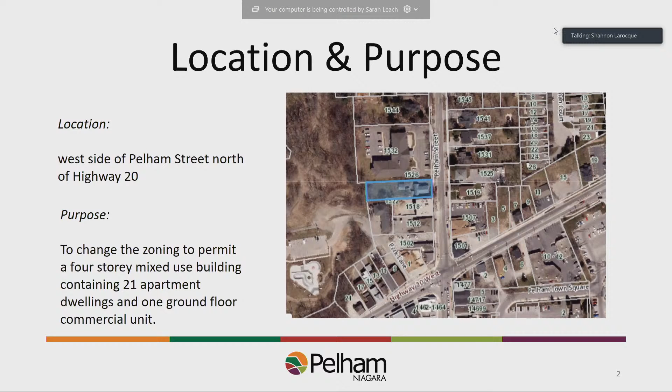The proposed site layout shows the building located at the southeast portion of the property, with the driveway located along the northern side of the property. There are 26 parking spaces being proposed, 10 of which will be located on the ground floor of the building with 3 stories above.

6 apartment dwellings are proposed to be 1-bedroom units, while the remaining units would be 2-bedroom units. Each would have their own private balcony.

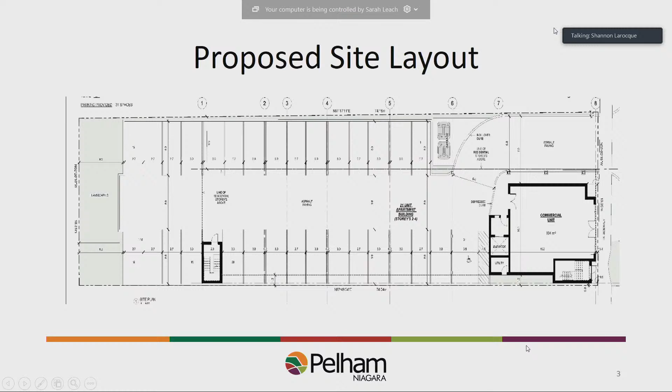The proposed building elevation from Pelham Street is shown on the left side, and the building elevation from the northeast is shown on the right, giving a better idea of what that ground floor parking looks like with the 3 stories above.

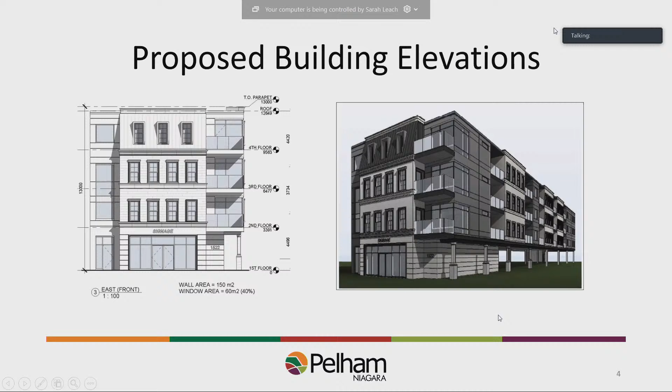In terms of the applicable planning policy framework, the property is located within a settlement area in the Provincial Policy Statement. In settlement areas, a mix of housing uses and types is encouraged, as well as densities that support transit and make good use of existing services and infrastructure. The property is within a delineated built-up area in the Growth Plan for the Greater Golden Horseshoe, which also encourages a mix of residential and employment uses.

The region's official plan designates the property as urban built-up area, and within the urban built-up area a full range of residential, commercial, and industrial uses are permitted, subject to available services and infrastructure. The policies in the region's plan promote higher density development and growth that contribute to a range of employment and housing types, and the region's plan also sets a 15% intensification target for new development within the urban built-up area in the Town of Pelham.

The town's official plan designates the property as being within the downtown. The downtown designation permits a wide range of commercial uses, as well as medium and high density residential uses on the upper floors of buildings. Parks are also permitted, along with accessory uses. The town's official plan also requires that when a building is proposed to exceed 3 stories, a zoning bylaw amendment is obtained.

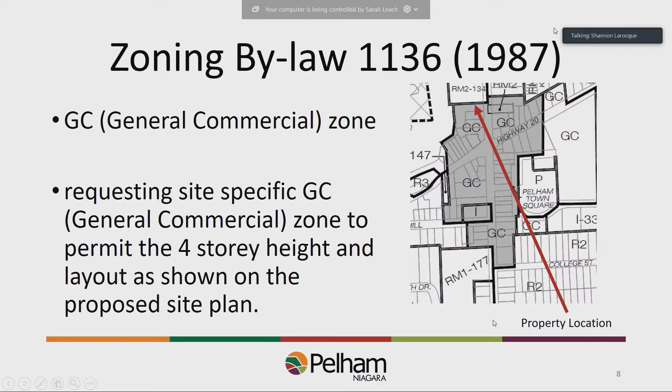The town's zoning bylaw zones the property as GC, general commercial, and the applicant is requesting a site-specific general commercial zone that would permit the 4-story height, as well as some site-specific regulations that would allow for the development as shown on the site plan.

Those site-specific regulations include an increase in the maximum lot coverage from 40% to 50%, an increase in the maximum gross floor area from 50% to 123% of the lot area, and an increase to 71% from the current 50% permitted for gross floor area used for dwelling units.

There is typically a requirement for minimum landscaped amenity area of 55 square meters per unit, and in this case the applicant is requesting that be deleted. The maximum building height for residential uses is not permitted or specified in the GC zone, and in this case the request is to go to 4 stories.

The parking requirement for apartment uses in the downtown is normally 1.5 spaces per unit, and in this case the request is to go down to 1.2 spaces per unit. There is also a standard requirement for a 3-meter wide planting strip between a parking area and a residential use, which for this property would be along the north side, and the applicant has requested that be reduced to 0 meters.

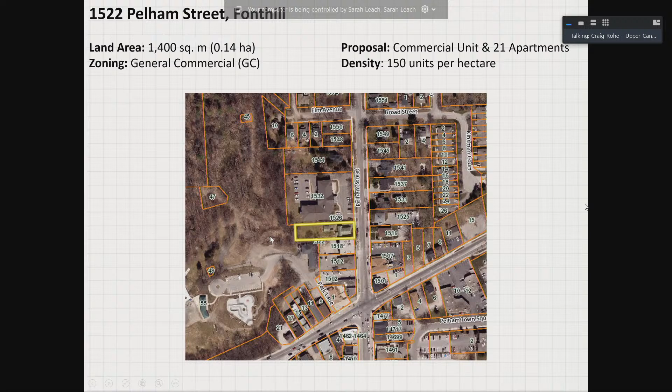The applications before council this evening pertain to 1522 Pelham Street in Fonthill. The subject lands are located within the downtown and are zoned general commercial in the town zoning bylaw. The property is approximately 0.14 hectares in size, located on the west side of Pelham Street. The subject lands are flanked to the south by an existing 3-story mixed-use building. To the north is the 3-story Short Hills Retirement Villa. There's some commercial development to the east, and Marlene Stewart Streit Park is located to the west of the subject lands.

In terms of property context, our subject lands are located within downtown Fonthill, and are situated along the municipally designated intensification corridor, which is Pelham Street in this case. The subject lands are designated as urban area and built-up area in the region's official plan. The policy direction for urban and built-up areas generally encourages development to occur on existing municipal services, in walkable areas or those provided with public transit, and in an intensified manner to avoid undue absorption of valuable greenfield lands or expansions to urban boundaries. The regional plan also emphasizes the importance of developing locally designated intensification corridors or areas.

Pelham Street, as noted, is designated as an intensification corridor in the town's official plan. The town's official plan, as approved in 2012, also designates the subject lands as downtown. This designation promotes the development of mixed-use buildings with additional focus on the integration of residential units within the downtown area, specifically policy B1243A of the official plan. It does permit buildings taller than 3 stories in the downtown area, however they're subject to a zoning bylaw amendment, so more detailed analysis can be carried out when considering those applications.

In terms of the proposed development, our client is proposing a 4-story mixed-use building. The development plan includes a 104 square meter commercial unit at grade, located along the front. There's also 21 residential apartments spread over floors 2 to 4. Each of these floors will contain 7 residential units, with a mix of 1 and 2 bedrooms on each floor.

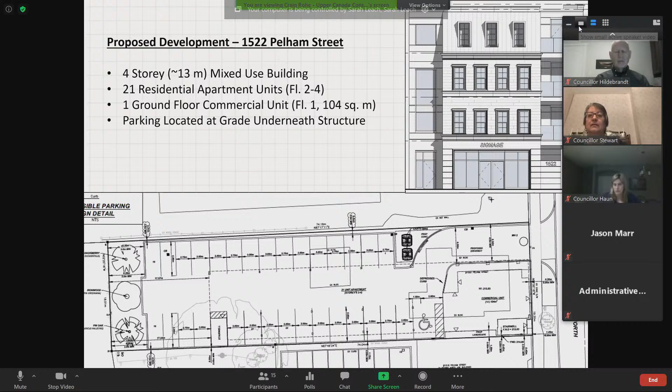That tree is considered an endangered species. In speaking with our biologists, their recommendation was that given its situation and setback from the property, there were likely no buffering requirements that would need to be implemented. We've elected to provide some additional landscaping to buffer that tree regardless.

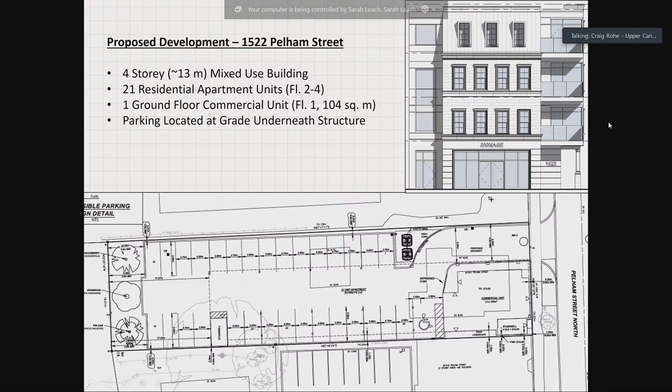This is one of the reasons we're under on the parking we asked for. As alluded to by Shannon, we're also waiting for the Ministry of Environment, Conservation and Parks to issue a clearance, so we'll know what mitigation measures and how much of a buffer we need.

In terms of the zoning bylaw, a lot of these provisions may have been addressed through the Committee of Adjustment and Minor Variance, but due to the test in the official plan, and because we're going up to 4 stories, we're required to come to Town Council for a zoning bylaw amendment to allow that 4th floor.

We've asked for a maximum lot coverage of 50%, where 40% is required. The effect of this basically allows us 1 additional unit at the back of the building spread over 3 floors, so 3 additional units, allowing additional residential development on the property.

The maximum gross floor area for dwelling units, we're asking for 71%, whereas 50% is required. The town's policies, as well as regional policy and good planning principles, indicate this site is in a good, very walkable area, surrounded by services and transportation routes. So it makes sense to increase density on the property consistent with those objectives.

In terms of maximum building height, the zoning bylaw requires 10.5 meters. We're requesting 13.0 meters, to the very top of the parapet. The roof height is about 12.5 meters on the architectural drawings, but we feel this additional height is compatible for this portion of the street.

For minimum parking, we're asking for 26 spaces, where 31 would be required based on the equations in the zoning bylaw. This equates to about 1.2 spaces per unit. As an example, apartment buildings in the City of Welland require 1 space per unit.